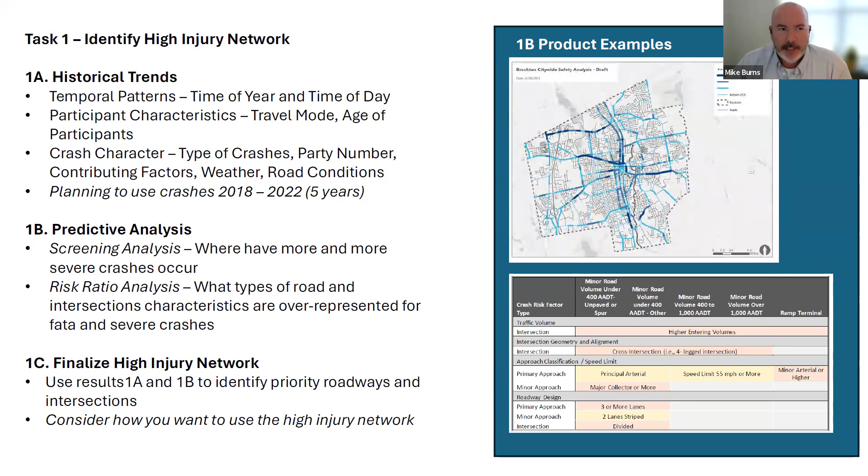We're going to try to go out to the larger community and have participation as well. So with all that said, that was a very high level kickoff to what is the safety action plan for Nantucket and what the scope of work is for that.

Now that I've gone through all of that, I'll hand it over to Alex and he'll walk you through these about 12 slides of maps of crashes, where they are, their types and severity. So Alex, I'll hand it over to you.

Thank you. Yeah, thank you. And it's great to be able to talk to this group. I think just like context setting here, I'm a transportation engineer, planner. I've worked 5 or 6 years doing plans around this context. Started doing a lot of work in California where I was previously located. And some of that work has actually flowed very well into these SS4As.

Just as an evolution of those, one of the things I'm really excited about is that the SS4A grant process really requires this type of interaction. It's really easy to say safety is something transportation professionals and staff are focused on, but everybody in this group is very much a part of that conversation. It's really good to start this process with this larger group, because the collective success is going to come from that broad knowledge.

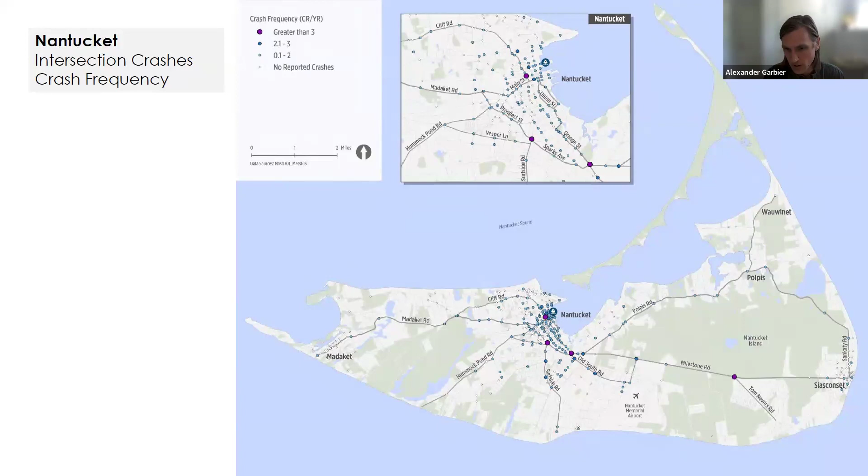I think we have a next steps slide, but questions there.

Mr. Chair, if it's all right, I'd like to use this group as a stakeholder group to share information as it's being developed by Alex's team, and to bring it to you all for comments. I'm going to use you all as a sounding board to proof the data before we share it with the public.

Like Alex said, we ultimately want to have a short list of prioritized safety improvements that could potentially seek funding to implement, as well as other programs. I don't believe Nantucket has a Vision Zero policy right now, or the idea of a safe system approach when engineering, which is a new thing that really hasn't been institutionalized in everything we do.

We have had efforts like Complete Streets, accommodating all modes and abilities with our transportation investments, ensuring we have sidewalks as part of roadway projects. So this is the same effort when we do a roadway investment, just ensuring we're picking the safest option when doing an alternatives analysis.

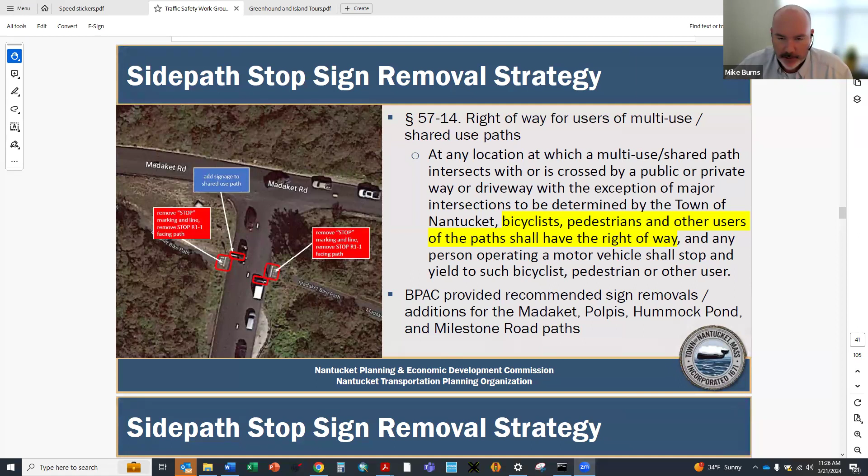So again, the packet does include a recommendation from BPAC. This does reference the town bylaw. I'm scrolling down - the text on this is impossible to read, but just to let you know, this is something that's in our town bylaws. So that part of it isn't necessarily being discussed. It's essentially these actions at various locations that DPW and I still need to visit, and I guess the idea is to bring a recommendation to this group to recommend that that's actually a safe strategy. And that's all I really have on this for right now.

I don't know if Drew wants to elaborate on this, or if Mr. Chair, you'd like to have some discussion on the bylaw itself and whether we should be moving stop signs from those approaches or not.

Thank you, Mr. Burns. I'm afraid I have some concern that this is going to make things less safe, but I understand that the bylaw was adopted. Seems like we're encouraging, or perhaps giving bicyclists a great, maybe a false sense of security, but I understand they don't stop there now. But it's probably a bit of a no-win situation.

If I may, I shared your concern, Mr. Chair, especially at certain locations, which is why Mike and I discussed going out to understand where the bylaw may be applied without negative effects. But we definitely share the concern that allowing cyclists to continue through roadway intersections without the stop signs may contribute to essentially the presentation we saw earlier highlighted the frequency at which vehicles and cyclists collide. And my fear is that number will go up. But there may be some opportunities to apply the bylaw without taking those steps backwards from a safety perspective.

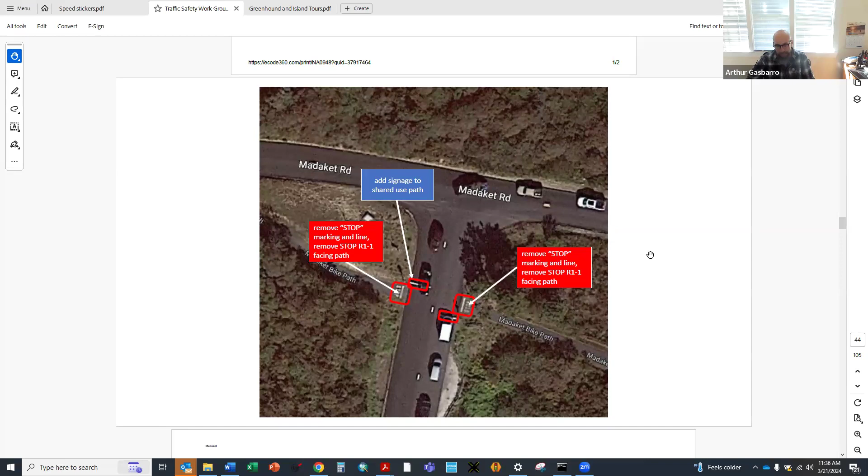Hearing none, we'll move on to the review of the speed sign summary, Mr. Burns.

You're muted. Sorry, it's contagious, Erica.

There's this summary sheet in the packet. I was wondering if anybody had any questions about the data that was collected from the speed feedback sign, happy to answer those. But I did share this with the DPW director and the police chief.

There is a feature with the speed feedback sign where it did collect data. You could access that data remotely using a dashboard, so we could do a data inquiry 24 hours a day, 365 days a year. I thought it was helpful.

We did get good speed information, volume information, and we are pursuing purchasing a permanent counter to put at that same location, as well as 6 traffic counters at other locations that will not have a speed feedback feature, but will collect data very similar to this report. We'll have volume information, speed information, and the 6 counters that we'll be installing will actually collect some level of classification data, but that's going to be very high level, showing you a small, medium, or large vehicle. Large being an 18-wheeler, small vehicle being a passenger car, and medium being some kind of vehicle in between. So no more detail than that.

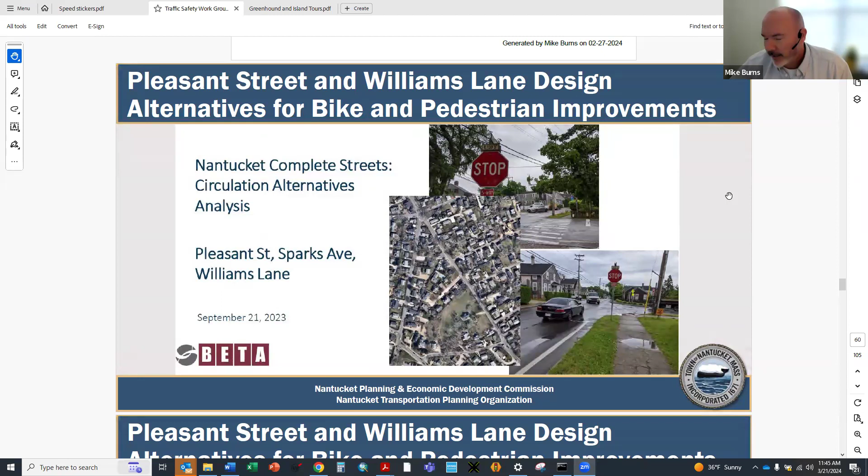Just to let you know that there were two different design alternatives for Pleasant and Williams. One option was to maintain two-way traffic. The other option was to maintain one-way traffic. The benefit of one-way was that it accommodated both bicyclists and pedestrians, and more of an array of users, and had less property impact for property and utilities. Whereas the two-way actually maintained traffic flow. And I'm going to scroll down to this, what I'm reading off of.

The two-way feature actually preserved traffic flow and provided more options for the driving public, but it was at the burden of bicycle users who would not have a dedicated facility and would have to share the traffic lane with vehicles under a bike route condition.

Mr. Chair, this has been shared with the Bike and Pedestrian Advisory Committee. They've made a recommendation to pilot a one-way option. That recommendation was shared with the NPEDC, who has reviewed that request and has taken no action. It's also been introduced to the Select Board. They have not taken any action. So again, this is not something that probably needs to be decided today, but at some point, depending on the actions of NPEDC and Select Board, might want to be aware that there is a recommendation to pilot the one-way alternative, since it does have the virtue of accommodating all users with a minimum amount of property and utility impact.

Thank you, Mr. Burns. I just wanted to point out that when Mike presented this to the NPEDC and the Select Board at a joint meeting, afterwards I let Mr. Burns know that we have a number of infrastructure projects going on within the town that impact Pleasant Street. And because I think the original idea was to try to implement the pilot program either this spring or next fall, I just wanted to go on record that our infrastructure projects will still be impacting Pleasant Street next fall. So this wouldn't even be a consideration at the earliest until maybe spring of 25, if at all.

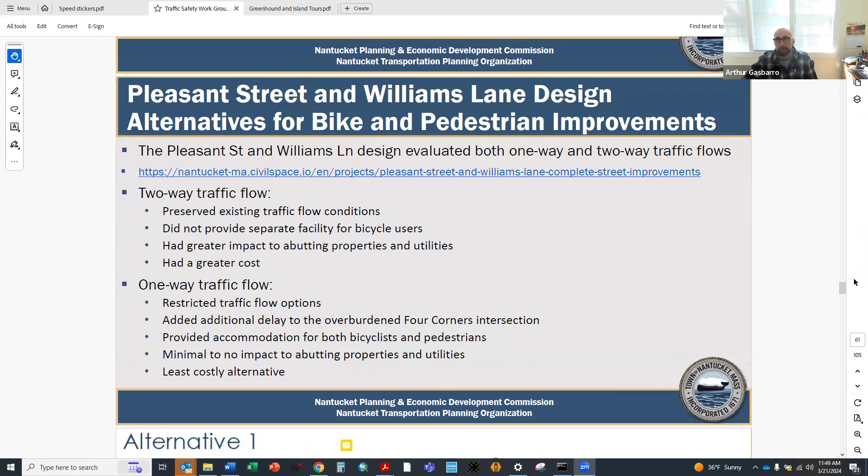I did have one other question about the base plans that were used. Was there actual survey in those underlying plans? Would the town be able to identify encroachments from those plans? And would it perhaps be beneficial to have an initial review using those survey plans to identify encroachments, such that it might help with interim improvements in terms of providing additional buffer for bicyclists still on the road, so they're not pushed out as far due to hedges or fences and that sort of thing. I understand it's a relatively narrow corridor, but I'm wondering if we might make use of those plans. Is there any low-hanging fruit? Is there a big hedge or two? Anything like that we could look at?

Short answer, yes. This slide does show the property line and hedges surveyed out, so you can scrub the survey plan to pick those out. If you'd like, I can share those plans with you. The ones you have on the screen right now are the ones I've taken notice of in the past that I think would be a big help to have removed, and I don't think we need to wait for a big project, since so often we don't have that kind of data. So I would suggest that for that particular hedge, that's the one that jumps out at me. I don't know if there are any other ones, so that no one feels singled out, but what I've long suspected right there is true.

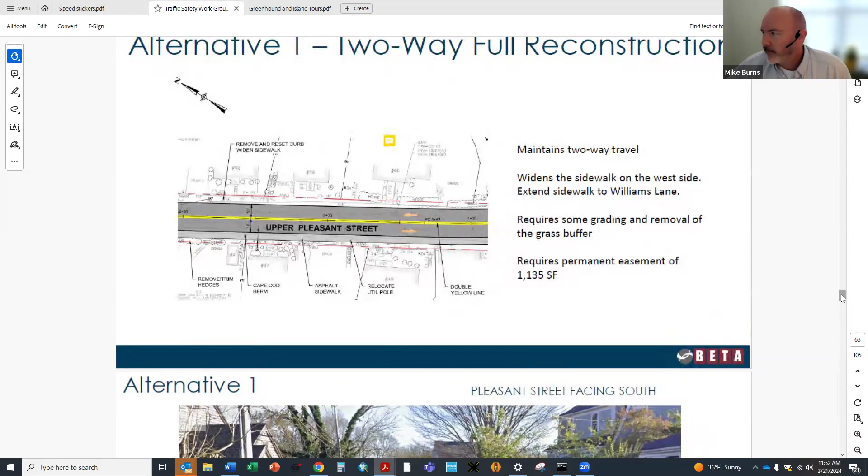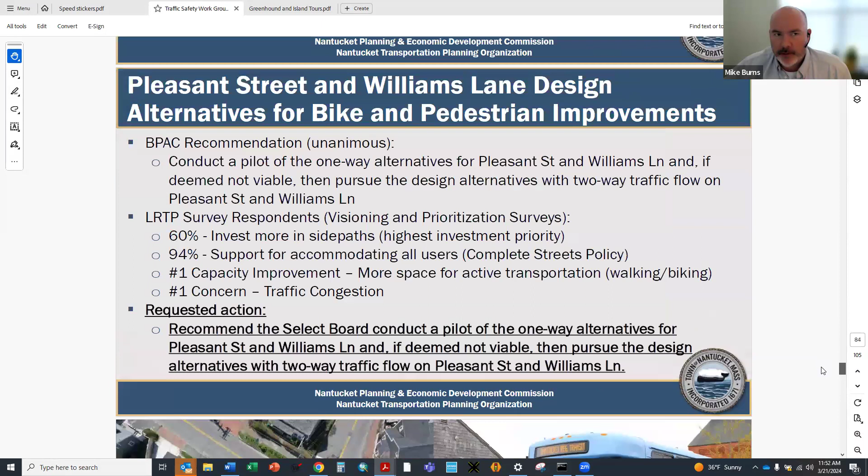And the bike safety campaign. Thank you, Mr. Chair. I'm just scrolling down to those slides now, and I've shared this with the police chief, who I believe just left the meeting. Yeah, she put a note in the chat saying she had to duck out for another meeting.

She left at 11:50. Okay. And just to let you know, I've been coordinating with the Chamber of Commerce, the town's communications staff, the Land Bank, and the Nantucket Conservation Foundation on some strategies to, one, encourage wearing bike helmets more often, two, share the regulations on e-bikes, and three, use bike registration as the medium for providing that information.

We would like to use bike registration. There's a local bylaw that all bikes operating on our streets should be licensed. That goes back a number of decades, and it's not really done diligently anymore. I don't know if there are a lot of licensed bikes on Nantucket, but the idea is to bring that requirement to light and incentivize it, perhaps by waiving the current $2.50 registration charge.

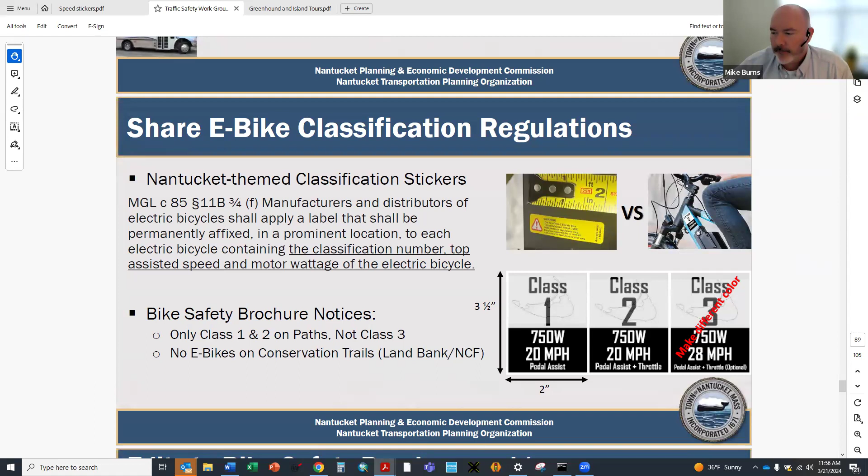At the very top of this slide, you see what the manufacturer provides - a 2-inch wide yellow sticker with incredibly small font that's impossible to read. The idea is to have something bolder with the class on there. I actually have a sample: class 1 and 2 with a white background and black font, and conversely class 3 with a black background, so they're easy to see from some distance.

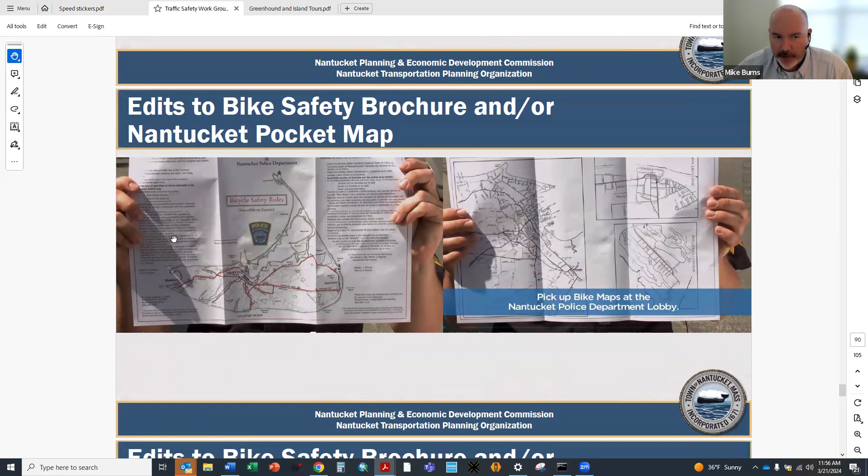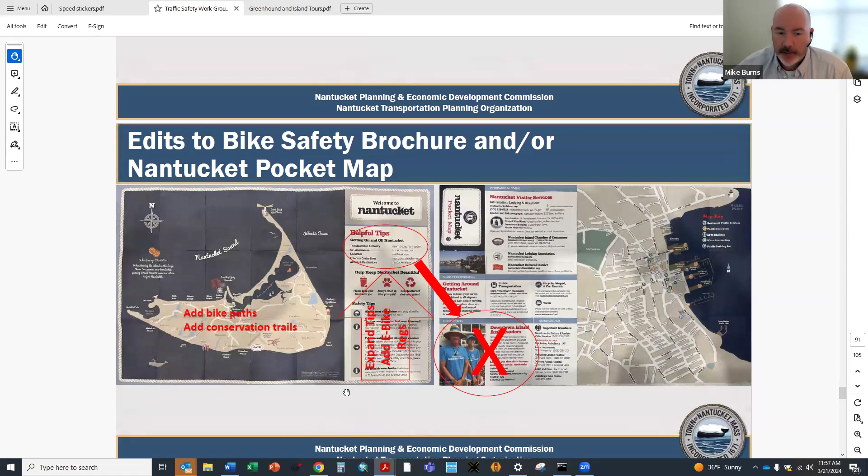So that would be the treatment for the e-bikes. There's a bike safety brochure that Kevin Marshall from the police department had developed. You can see from the brochure the images that it was very text heavy. We wanted to correct that and use Culture and Tourism's pocket map to provide more safety tips in a succinct manner that are easy to read by the public and understand and hopefully abide. So that's a work in progress.

Just to illuminate the actual rules of the road, this is a very verbose set of rights and restrictions for bicyclists. I don't know if anybody would ever read all of these bullet points to understand them all. So we've actually gone through the effort of refining those down to a manageable set of bullet points, and that's been shared with Culture and Tourism.

Mr. Chair, just again, informational to share with you all that there has been some diligence to encourage wearing bike helmets so that if there is a collision involving a bicycle, the damage is minimized and everyone can walk away from that.

And again, change the culture of the community to respect more of these safety best practices, like wearing a helmet, using hand signals to change lanes, and educating e-bike users that class 1 and 2 are permitted for a lot of areas, but not class 3. No e-bike is actually permitted on natural surface trails, like land bank trails or Conservation Foundation trails. E-bikes are not permitted there at all. The effort is to kind of spread that information to the public so that there's more awareness of it all. So thank you for letting me run through all those strategies.

That's great. Thank you, Mr. Burns. I hope this feels a step in the right direction. Really good. As soon as I can share those sticker images, they are fun.